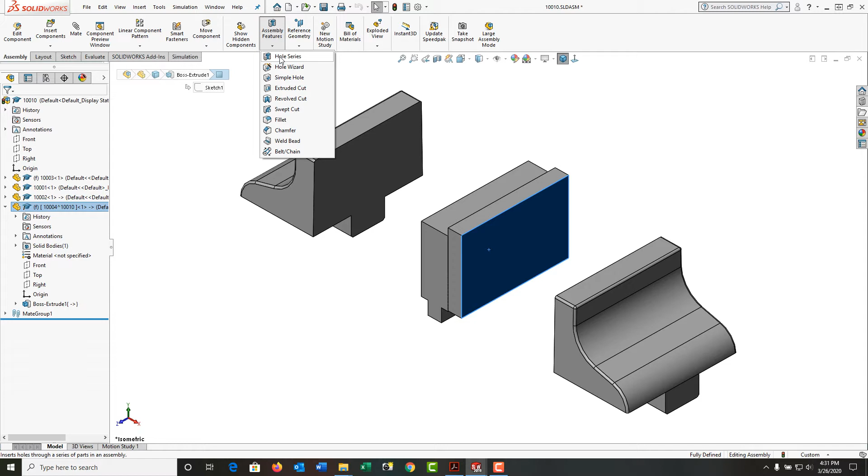Now that I've created this soft jaw and the solid jaw in my assembly, I want to add a fastener hole and fastener to join them. To do that, I'm going to first select this face, and then I'm going to come up to the assembly features drop-down menu, and I'm going to use a hole series. I'm not going to use a hole wizard. I want to use a hole series, which will create hole wizard holes in all the parts I wish joined, and the alignment will be perfect. So I'll select hole series.

I've selected this face. Notice my pointer is the pencil with the point tool active, and because I pre-selected the face, I'm sketching on that plane, and I'm going to click once and click again to add 2 holes, and then push the escape key to stop. Then I'm going to select the 2 points, and I'm going to make them horizontal, and I'm going to add a center line to my sketch.

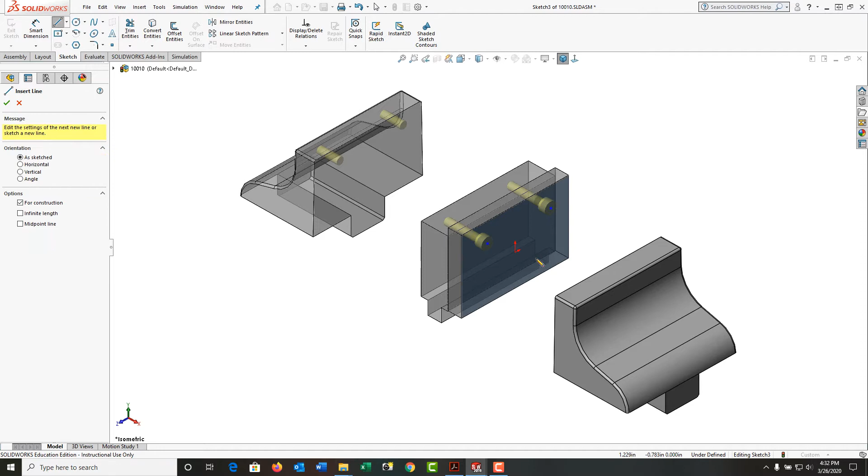So I'll activate center line. I'm going to rotate around so it's easier to see. I'm going to select the origin, and I'm going to create a vertical center line. Push escape to stop that. I'll select each point while holding control on the center line, release control, and I'm going to make these symmetric.

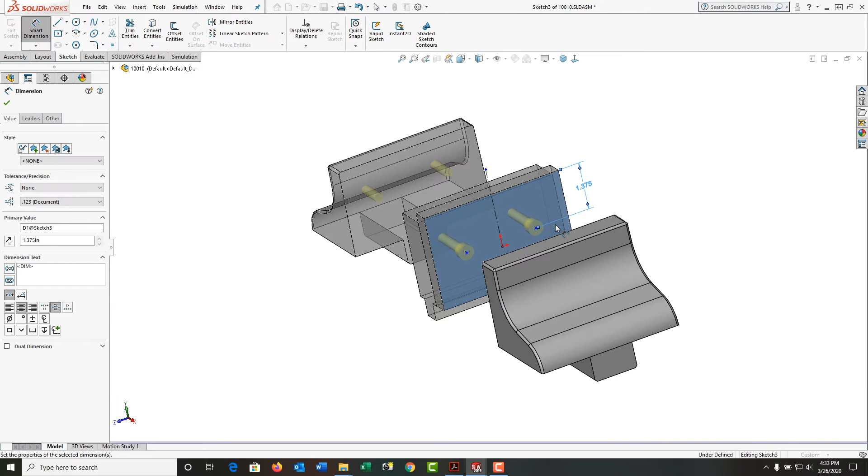And now to finish the sketch, I'll fully define it with dimensions. So I use mouse gestures to activate dimension. And I'm going to tell it from the top down is 1 3/8 inches, and that the center to center distance of the holes is 2 1/4. My sketch is now fully defined. So I'll come back here, tell it I'm done with dimensions.

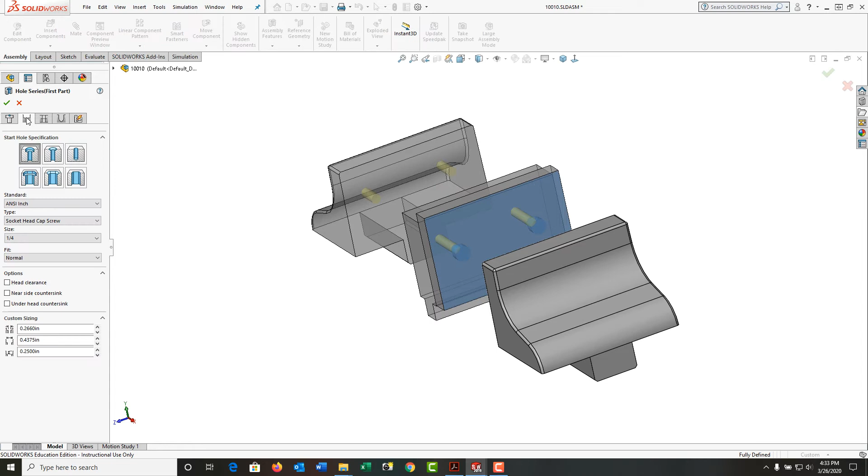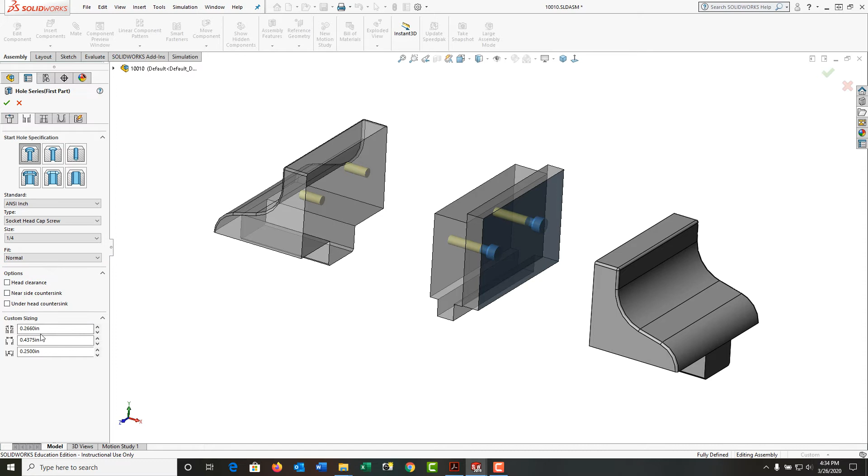With the hole series, I've chosen create new holes. I could have also used existing holes in parts. Then I'm going to come to the next little tab here. And what I'm going to say is in the first part where I made the sketch, this soft jaw, what type of hole do I want? For the hole type, I'm going to use the counterbore hole, 1/4 inch socket head cap screw. And I'll set the size to 1/4 and use the normal fit. If I want extra clearance, I can turn it on here just like I would any standard hole wizard hole.

The next tab is, are there more than 2 parts? In this case, there aren't. If there were more than 2 parts, I would tell it, do I want a clearance hole in these parts or do I want a clearance slot? It will be auto sized based on the 1/4 inch fastener hole.

Then I'm going to come to this tab and I'm going to say in the final part, what type of hole do I want? And I'm going to choose the threaded hole, bottom tapped hole, and it recognized that I started with 1/4 and it's suggesting a 1/4 inch thread, and I do want that. For the end condition, I'm going to say through all. That will put it through this entire part, because I'm also going to create this jaw on the other side and bolt it too. So I've chosen the style display. I'm going to say add the thread callout.

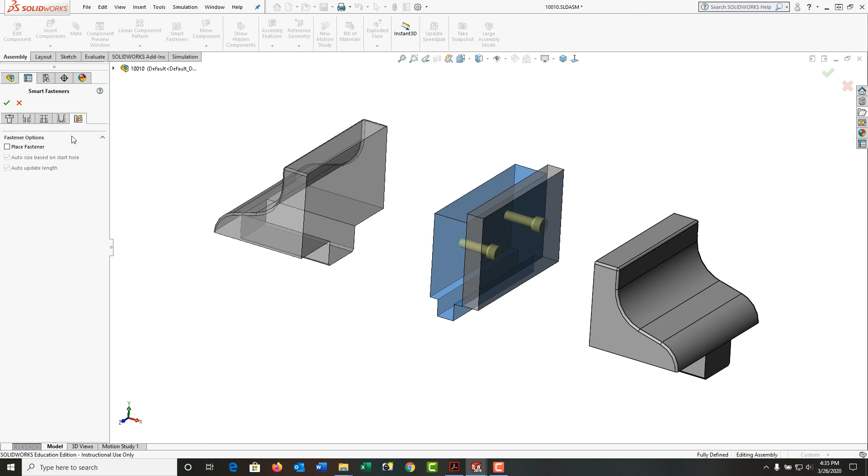What I need to do here, this cell is blue because it wants me to choose what will be the final component. And I'll choose this component. You'll notice how the holes disappeared from this part and they're now here. I'm not going to add the smart fastener because if I make changes later, I find this a frustrating feature that constantly needs updating. So I've set up all the hole types. I started with the position. I'm going to say OK. I'm going to turn off my annotations.

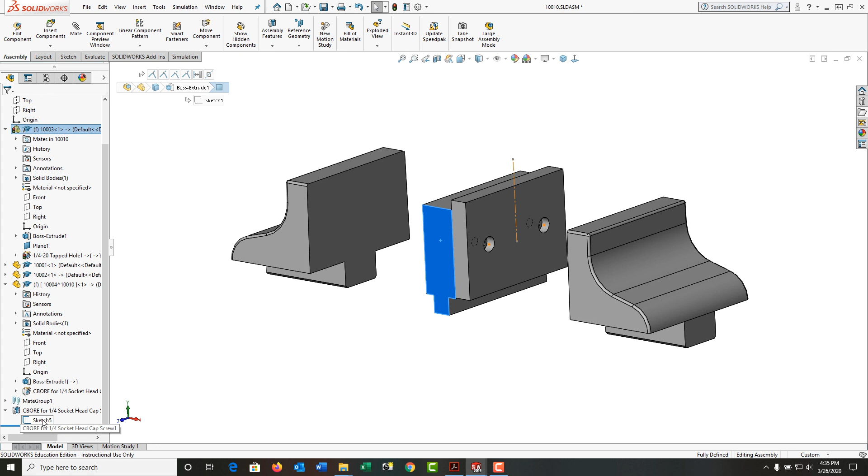And now I have a clearance hole in this part. And in my solid jaw, I have the tapped hole. Both created in the context of the assembly, which is what this arrow is telling me in each case. And down here I see the hole series. With the hole series, SOLIDWORKS always puts the visibility of the sketch on. So I'm just going to select it and I'm going to hide that sketch. Now that I've created a hole series and I'm happy with it, I'm going to save my work.